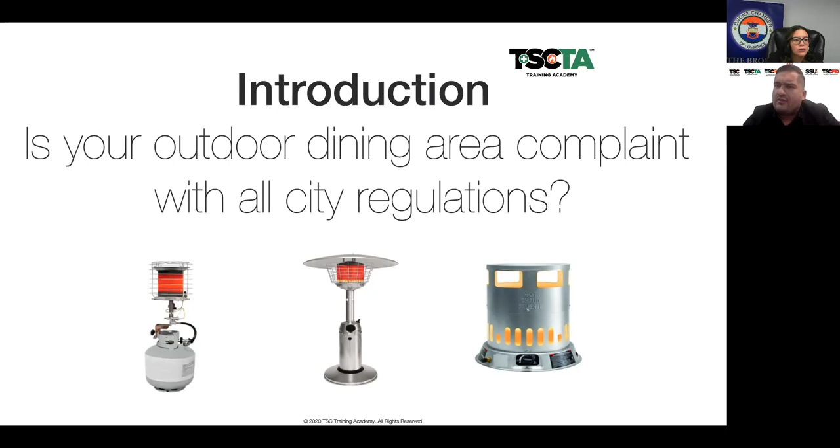So complacency and compliance is what you're looking for. Now, winter is coming, ladies and gentlemen.

And winter's here. Thankfully for the restaurant and hospitality industry, it's been a somewhat friendly winter. But what happens as we move deeper into December and January, when temperatures drop and you want to utilize your sidewalk eating areas? What do you need to know?

What do you need to follow? So we're here, okay? We're going to walk you through how we proceed moving forward.

Is your business compliant? Are you going to be able to comply with the New York City Department of Buildings requirements, Bulletin 008? Are you going to comply with the FDNY requirements for heating? Are you going to comply with the DOT requirements as they pertain to sidewalk and street eating? We're going to walk you through all three requirements, so by the time I'm done, you'll either have some good questions or be guided on what might be best for your business.

So let's start with how did this all begin. Remember, Cuomo put us into Phase 2 for the city of New York. Until then, the city of New York was pretty much shut down.

There was no idea of when a restaurant, bar, or storefront might be able to utilize outdoor seating for patrons, which put a massive stranglehold on the industry. And the industry was suffering.

So once we got into Phase 2, Cuomo provided the industry a lifeline, and de Blasio provided the industry a lifeline. That lifeline was known as Executive Order 126, started June 18th, signed by the mayor. The city of New York was now able to utilize its sidewalks and its actual streets in order to maximize the number of patrons a restaurant could see on a daily basis.

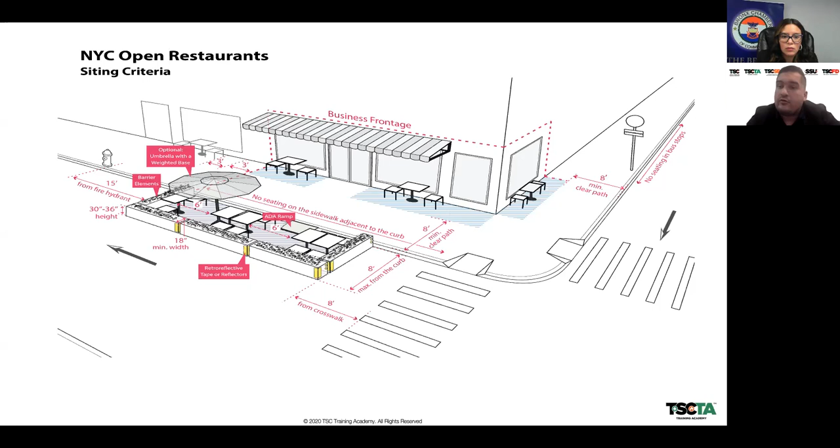There is no modification of furniture applied to New York City streets, and this is very simple. They also require 15 feet from your fire hydrants, and 8 feet from your crosswalks.

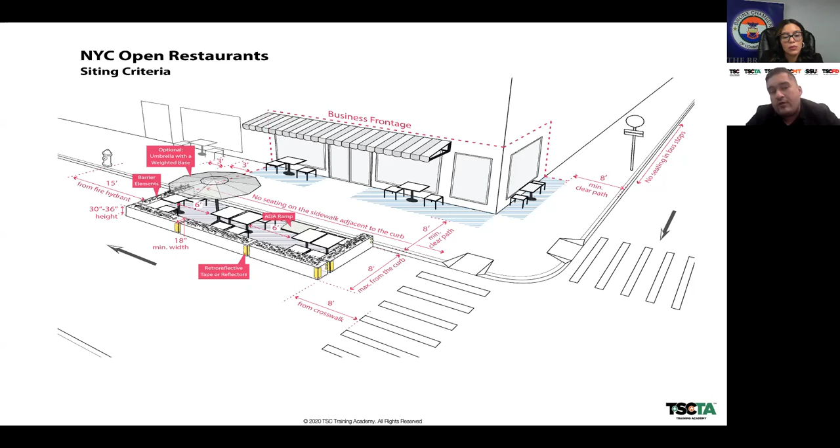What started happening is, if you follow these rules, all city regulations left you alone. Now, if you wanted to participate in a street program, in which New York City closes down streets and multiple businesses could apply on one application, the requirements were a bit different.

You still need to maintain the 8 feet of clearance path for pedestrians. You're still only going to use 5 feet of frontage space in front of your establishment, but the flexibility became the following, ladies and gentlemen.

In this open lane, you could now put multiple stations 6 feet from one another, and if you kept 15 feet of distance for emergency purposes, you had more flexibility for people to be established in front of your business. A home run if you had a program in your neighborhood that was open streets.

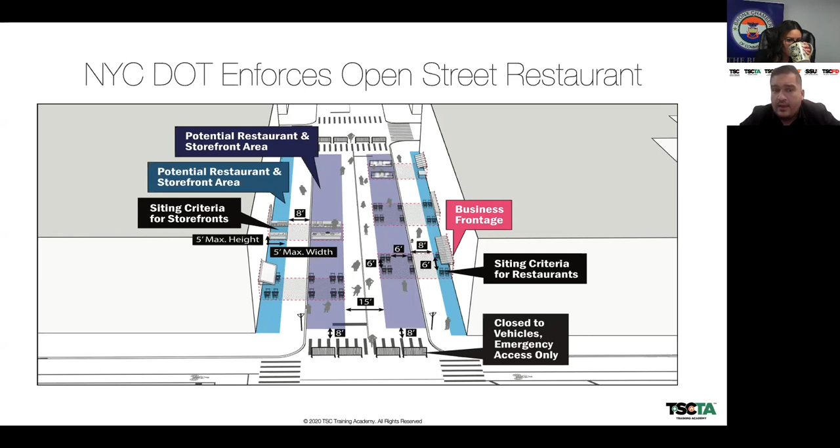We needed to keep, on the other end, distance from your fire hydrant from business to business on each end of the business, and in total we needed to keep 30 feet of actual distance from fire hydrants, 15 feet from each business.

You needed to keep an emergency lane that was at minimum 15 feet in width, okay? And all the other requirements apply.

Now, the difference here is the DOT becomes very specific on the barriers you're using to not allow cars to come in. The advantage here is that you could bring as much furniture as you like if you're in compliance, and you didn't have to start building.

Most restaurants did, but if you had an open street, you didn't have to start building additional furniture to protect your patrons, which is fantastic. In the application you guys fill out under the DOT, you have options for both.

Now, for some of you that might ask, hey Leo, I have a fruit stand, or hey Leo, I have a clothing store. The DOT also does enforce and encourage open storefronts for businesses as well, not just bars and restaurants. Open storefronts is another program you could participate in, which is ideal, and the requirements become similar to the restaurant protocols you have to follow.

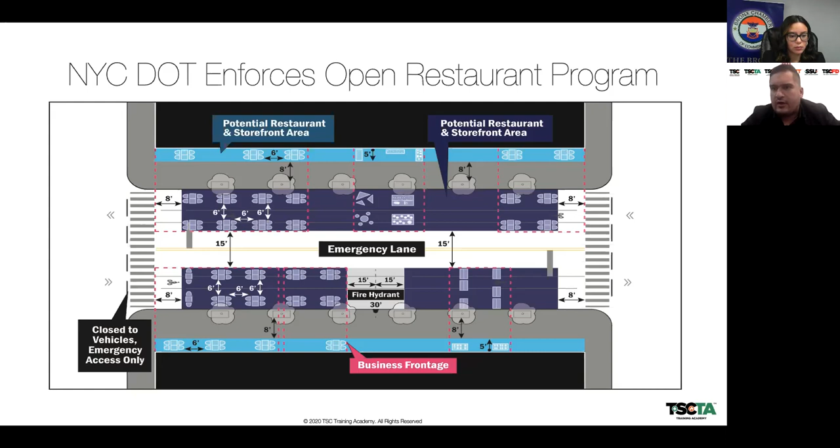Now, I know it's a lot of information moving quickly. Here's a fantastic resource you could reference. This is the DOT, showing exactly what they expect to see. They're in downtown Brooklyn in the Park Slope area, and they'll walk you through exactly what a compliant street and sidewalk eatery should look like.

Hi, I'm Chris, an inspector with the New York City Department of Transportation, here in Park Slope, Brooklyn, on a very hot day, in front of Fonda Restaurant to discuss the open restaurant seating setup in the roadway. You can take a look at the beautiful setup they have here, and if you'd like to be a part of the open restaurants experience, there are a few rules we need to follow. Now, the maximum width of a roadway setup needs to be 8 feet.

You can't have anything further out from the curb than 8 feet that could possibly obstruct vehicles, or like we have here, on a bike lane. Now, when it comes to the width of the setup, it needs to be a minimum of 18 inches, and it needs to be fully closed and a full U-shaped structure all the way around.

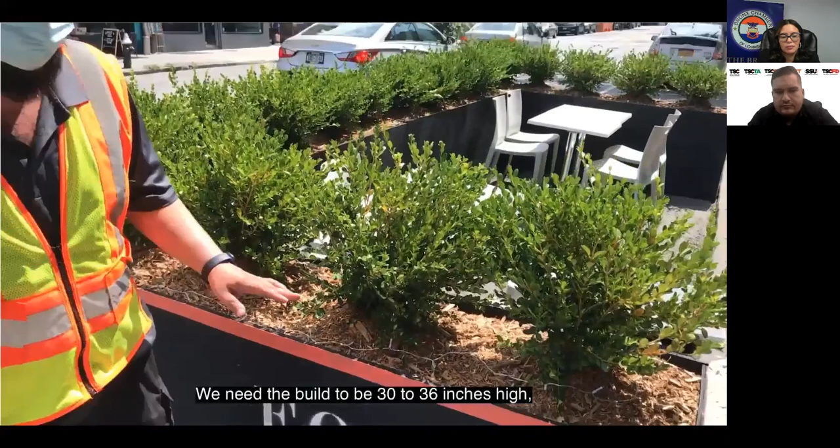Now, this serves as protection for the people dining in the seating area. You can do like they did here and fill the area with soil and put some plants for the beautification of the site. Now, what we need is the build to be 30 to 36 inches high and have reflectors placed at the end so the headlights of a vehicle will bounce off at nighttime for visibility and safety.

Now, as far as the dimensions of where you can put this, it does need to be directly in front of your property. We don't want any dining setups extended into another area. A few other measurements you need to keep in account: if you're near a crosswalk, we need a minimum of 8-foot clearance, and if there's a hydrant somewhere around, you need to clear the hydrant by a minimum of 15 feet. As far as traffic regulations are concerned, we have no stopping, no standing, and bus stops.

You cannot have these setups during active no standing hours, not in front of a bus stop at any time, and not in front of no stopping at any time. You may use the roadway dining if a no parking sign is in front of your business, but remember, you must remove or secure your tables and chairs when not in use.

Now we can discuss what's inside of the open restaurants area. First off, some options that you might have is you can build a platform, which would be flush with the sidewalk and provide ADA accessibility for anyone that needs it.

Here at Fonda, they don't have a platform, but what they do have is an ADA ramp. As long as you have an ADA ramp upon request, this is perfectly acceptable. A few other options that you might want to take into account, especially on a hot sunny day like today, would be a tent or an umbrella.

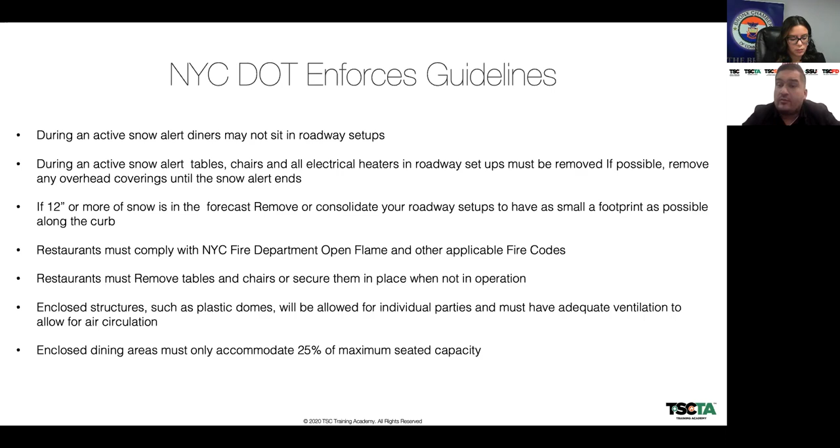If you have one side open, 50%. If you have all sides open, then it's going to be based on your location and keeping a minimum 6 feet of distance. This is just some of the key guidelines that the DOT wants to enforce as the winter months start approaching.

Now we start coming into September, starts getting chilly. Now we're closer to October. Then everyone says, okay, how about now? We enjoyed this program, we complied, it was fantastic for our business. What happens now? How do we move into the winter months?

And this is exactly where de Blasio gives his hospitality business industry a massive lifeline. He goes into stating, look, this worked, let's keep it going. Let's help this industry that is miserably suffering right now.

The city establishes Executive Order 153, in which it extends all of your outdoor seating through the whole year until further notice. And it maximizes your flexibility of human comfort by allowing city restaurants to use propane space heaters. Now, what did the city of New York do?

In this executive order, Mayor de Blasio makes the FDNY responsible for compliance of exactly when you need to have a permit for your propane heaters, how you're going to store your propane heaters, where your propane heaters need to be stored, and where you're not going to be able to see propane heaters.

Ladies and gentlemen, this is what we discuss in detail in a Certificate of Fitness T93 course we offer at the Academy. When it comes to heating, you have some options: propane heating, electrical heating, and piped natural gas.

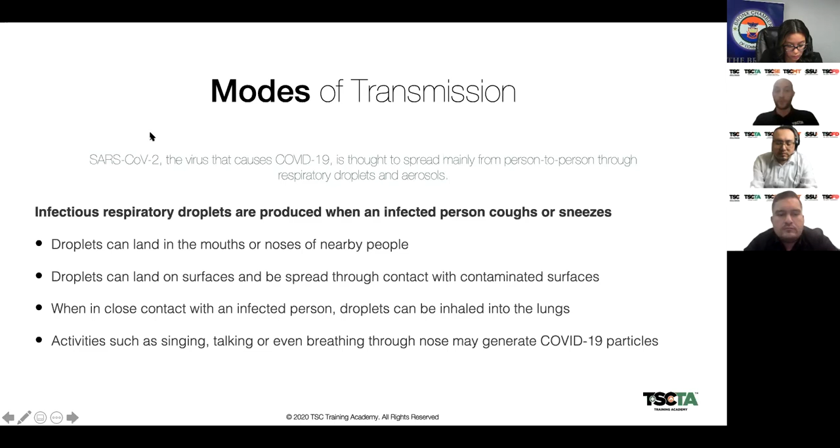So just to give you an idea what type of droplets or particles we're talking about, and how that relates to some other objects or particles you may deal with on a daily basis - normally respirable droplets will have a diameter less than 10 microns. To give you an idea how small that particle is, if you take a single hair, as you can see on the image, and cut it in half and look under the microscope at the diameter of the hair, the diameter of human hair is approximately 50 to 70 microns in size.

So now, how does that tie into the size of particles of COVID-19, of CoV-2 aerosols? The smallest particles are estimated to be as small as 0.1 micron. So you can see the range of aerosols between 0.125 to 5 microns. This is where the particle is small enough to reach your lung tissue and eventually potentially affect you in the long term and cause a medical condition. So the size of respiratory droplet is really what our concern is, and how our ventilation and filtration systems are capable of handling the spread of that virus and that size of particle is an important question to address.

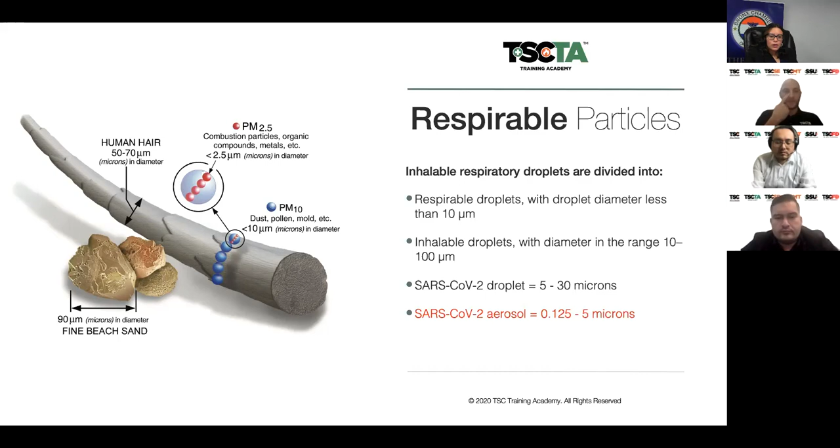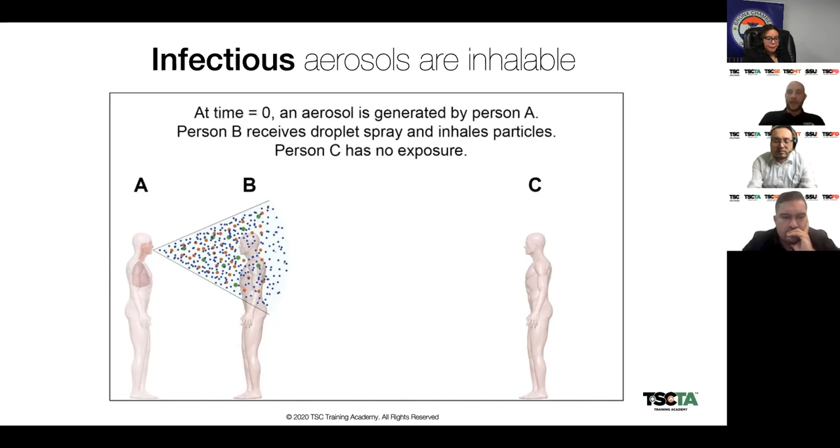Seeing how small these particles are, transmission normally occurs in areas that are dense, where you see larger groups of people sitting or eating. If somebody is sneezing or coughing, the aerosol is generated by person A, and the virus itself is never just traveling as a particle by itself - it's within the aerosol. So the virus particle is in the aerosol that you sneeze, cough, or breathe out, generated by the infected person A. When that air travels, person B may receive droplets first.

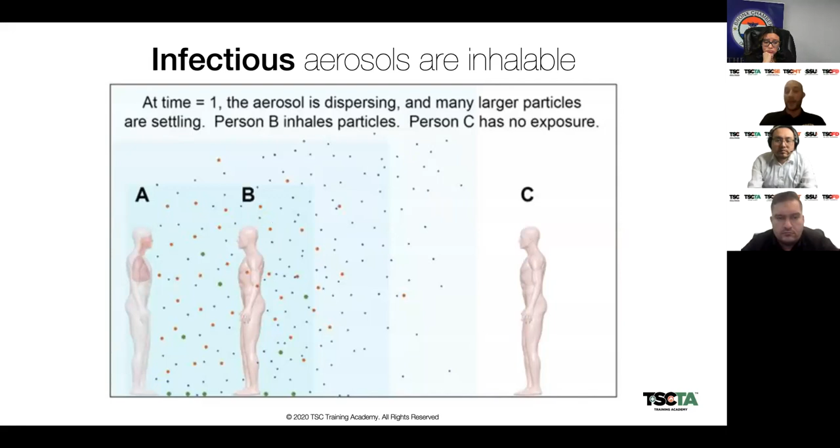Over time, because of how light the aerosol particles are, they start dispersing throughout the space. The larger particles settle down, but the smaller ones - those smaller than 10 microns - start traveling throughout the space and linger there. According to research, that can take hours before those particles actually settle down. During those hours, you have to think about how many people use the same area from the actual exposure that came from person A. So at time 2, after a while, the aerosol is dispersed and many larger particles are deposited on the floor, but person B and C will inhale the small particles that unfortunately may include the virus itself.

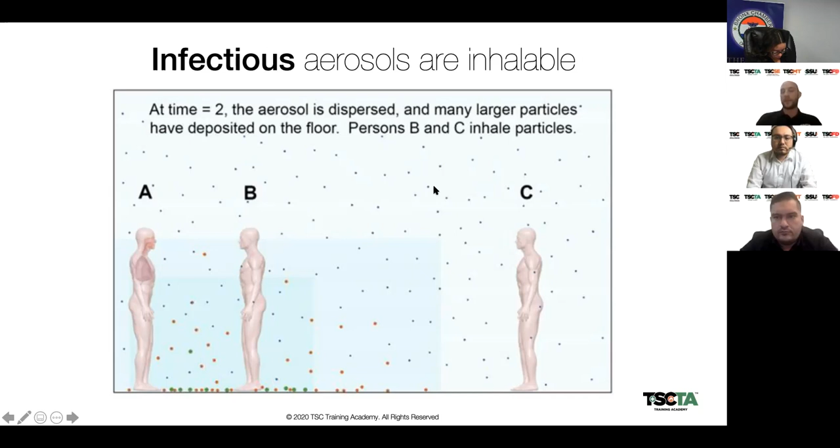One of the main issues is that very often in older buildings, our ventilation systems use recirculated air, and there's not enough fresh air being provided from outside through the HVAC systems. If the air is recirculated and the unit doesn't have a highly efficient filter, there's still a high risk of people inside the building, facility, or restaurant being affected. This means particles may be suspended in the indoor air for a prolonged period of time, so even one person may affect the entire group. So indoor air quality will be a priority.

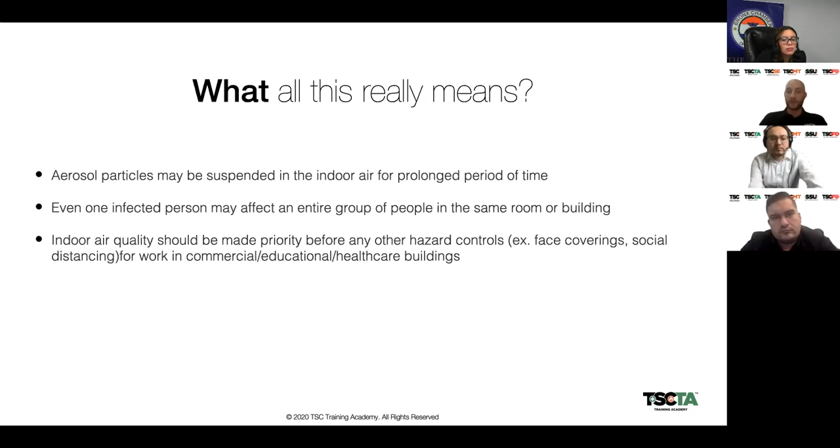But at the same time, this shows why setting up the outdoor area in accordance with the guidance released by the city is going to be vital, and why they limit the amount of people allowed to use the indoor spacing - we're looking at 25% - and outdoor spacing, if enclosed, will have the same restriction.

Moving on to the ventilation system within your facility, restaurant, or workplace - normally those systems are designed more for comfort, to continue supplying fresh outside air. But over the years, we noticed the design of ventilation systems focuses more on keeping us from polluted air from outside and just using recirculated air from inside. The approach with COVID-19 is actually quite the opposite - now fresh air became almost our friend, and we want to utilize a system that provides as much fresh air as possible. Of course, we won't know if that's the case until we actually evaluate the system being used by our building.

Generally, we maintain temperature in the summer and winter to make sure people inside that building or area feel comfortable. We can also use ventilation to reduce potential fire or explosion hazards, or dilute airborne contaminants if you're talking about a lab or industrial environment.

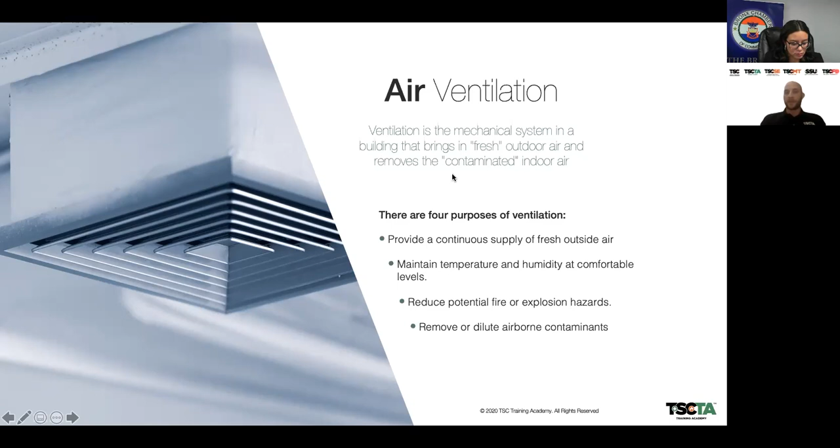So what is critical when it comes to filtering of the air that's being provided to the customers, to the employees?

Ideally, according to some of the recommendations that were released recently by the American Conference of Governmental Industrial Hygienists and ASHRAE, the ideal range of air changes should be between 6 to 12. That's the goal we should have, and something we should verify with either the building management or have an HVAC technician come in to verify that we're within that range.

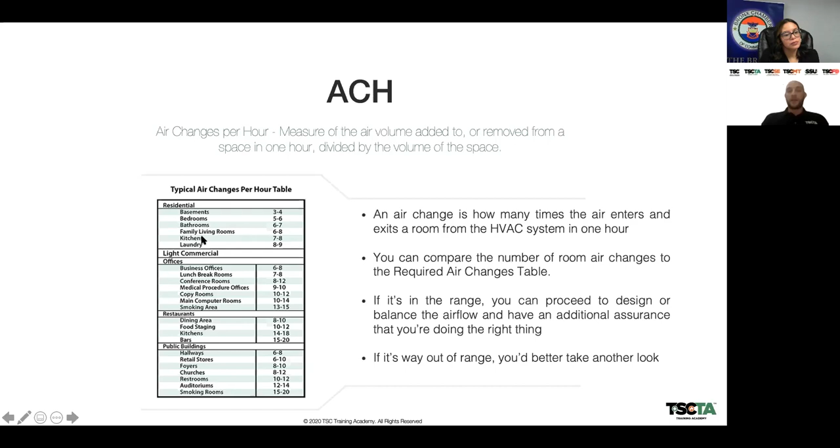Now, the other important aspect will be to verify that the filter being used within our system is actually capable of helping us reduce the risk of spread of COVID-19 particles. I want to bring back the size of particle that we discussed before.

So particles between 0.3 microns and 1 micron, you have no information, no data on how effective those filters are. To be honest, the majority of facilities use filters rated MERV 8 to MERV 10. In other words, when the air is recirculated and somebody sneezes, that air starts traveling through the HVAC system, and technically the SARS-CoV-2 particles are not being addressed at all.

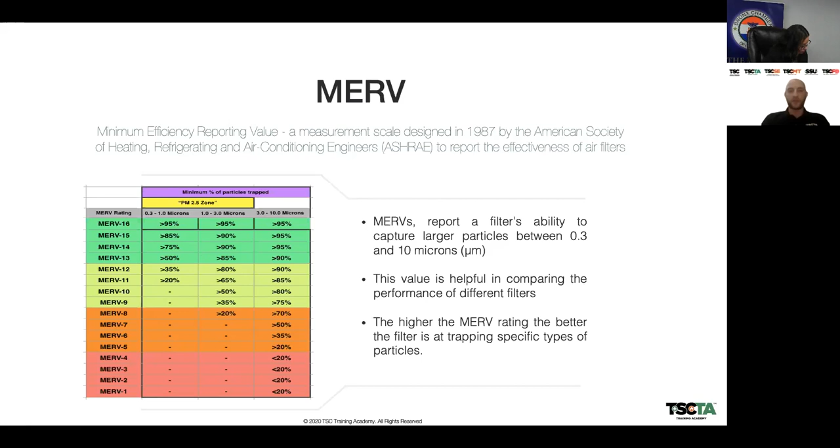Ideally, we can say a MERV 15 or MERV 16 filter would be great, but in reality those filters are usually used by hospital facilities—that's where the real need is. Plus the system has to be able to push the air through that filter, which may not be capable.

So another way of looking at the filters available out there may be a little easier to grasp instead of just looking at the size of microns. Here from one of the manufacturers, they advertise that a MERV 6 filter would be good for lint, household dust, pollen. But if you're looking at a MERV 13 filter, it protects from all those varieties of potential sources of contamination: cough, sneeze, bacteria, viruses.

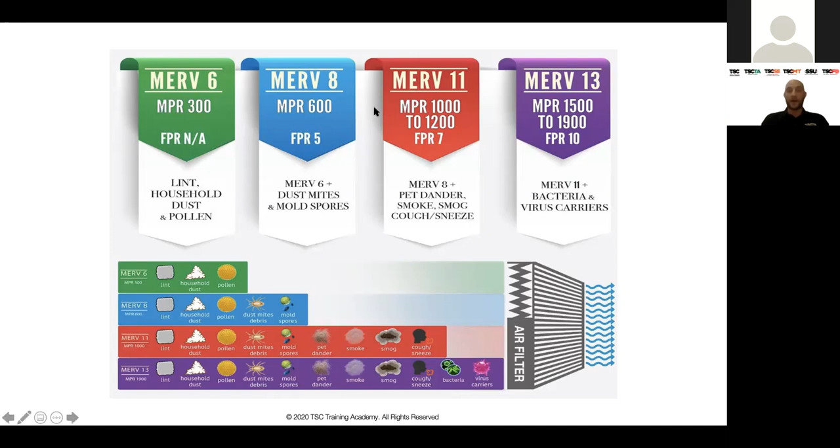So now, again, the question is: is the filter used within my restaurant or my workplace within that range? What kind of rating are we using? It's something that maybe you didn't have to look for before, because it wasn't really required. But at this point, since September of this year, all restaurants providing indoor dining are required to ensure they're using filters rated MERV 13.

You also have HEPA filters, which are high efficiency particulate filters. These are usually very expensive, and normally you would see them with air purifiers. They are very effective because they have the ability to filter 99.97% of particles of size 0.3 microns and more. They also technically filter particles that are obviously larger and smaller in size. There's more science behind it, but generally HEPA filters are desirable and definitely meet those requirements.

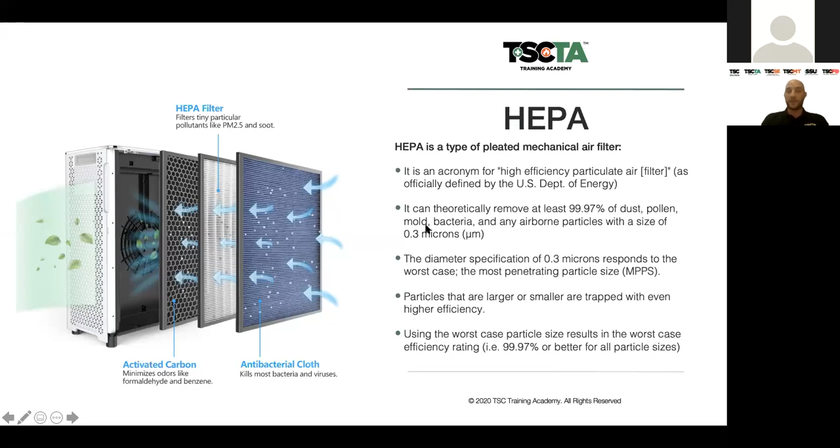So again, the question is: is my standard building ventilation effective enough to prevent the spread of the virus? Usually your system will utilize approximately 10 to 20% fresh air, and the MERV filters will be 8 to 10 on the rating chart. Which means that with a standard ventilation system, we have to obviously take additional steps to ensure that customers, and especially employees who are there full-time, can work safely in those environments.

Now, 10 to 20% of fresh air is recommended, though 100% fresh air would be ideal. Simply put, the more the better, and 10 to 20% is really very little if you think about the amount of air that will be recirculated.

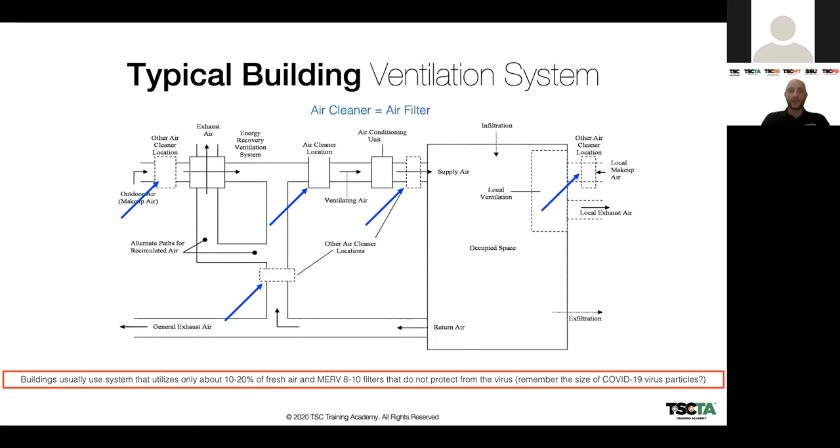So in September, Executive Order 202.61 was released, and since then, all food service establishments in New York City were told that if they're using indoor dining, central air handling systems will have to be equipped with a minimum MERV 13 filters.

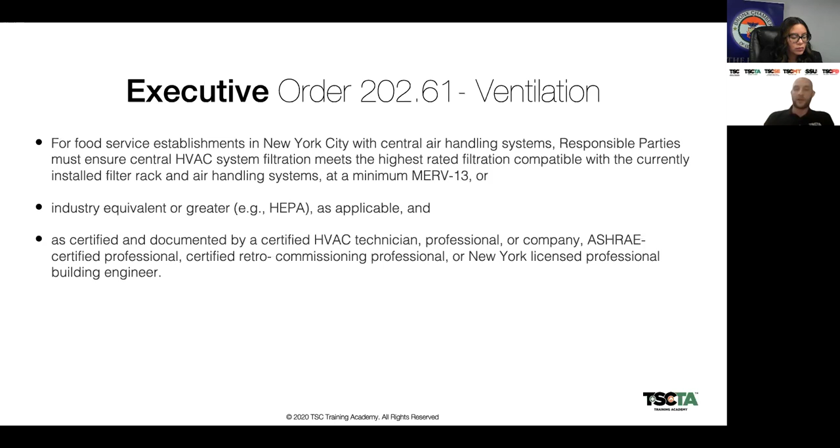And of course, if you have a higher rating, that's fine, or industry equivalent or greater filtration, for example HEPA. That must be certified and documented by a certified HVAC technician, professional or company, or an ASHRAE certified professional—not just us saying this should work and adding a filter to our HVAC system, because we may not even realize the installation is wrong. Maybe we didn't follow manufacturer specs, or maybe our unit is just not capable of pushing the air through that filter.

So what about other alternative ventilation methods? Will this work? What if we just open the windows? The problem with just opening windows for fresher ventilation is there's no way to measure how much filtration we actually get—there's no filtration itself. So even though it may work outdoors, where you're leaving a whole side of your dining area open, indoors it gets complicated because of the configuration of the space.

Purifiers, great, not a problem. Purifiers are great as an addition. So if you want to have a purifier next to each table, awesome, but by itself a purifier will not provide the quality of air needed. The main limitation of purifiers is that they're designed for a specific square footage of area. So the question is, can we cover the entire square footage we're utilizing in our facility? Most of the time, you won't be able to do that. So an air purifier alone also will not do the trick.

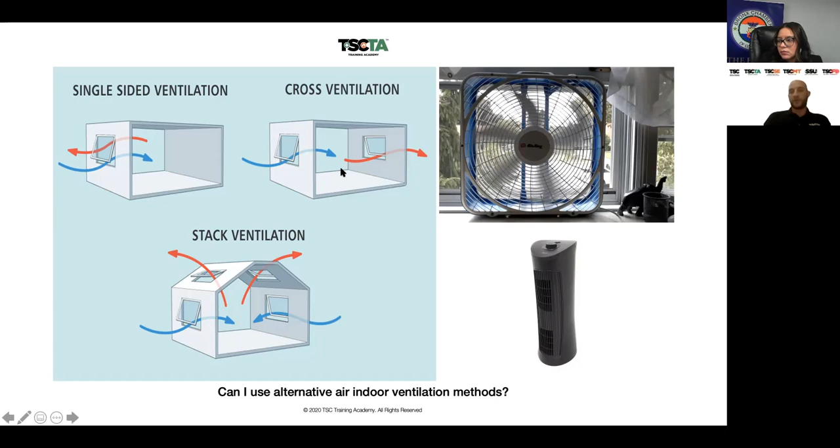So altogether, the idea is how can we protect the worker, or how can we protect the client. You need effective ventilation—as many air changes as possible, with a source of clean air. On top of it, adding a portable air cleaner is great. But the main focus will be to make sure that the same air is not being recirculated throughout the building, throughout the facility, throughout the dining rooms.

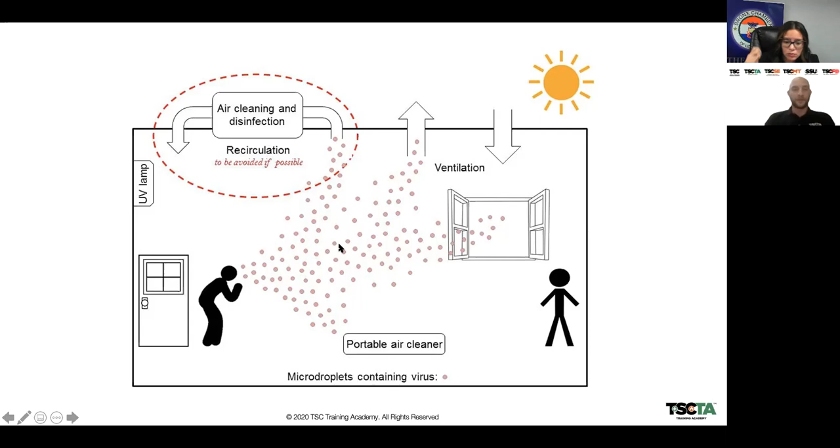So a few words about personal protective equipment. If you want to find out more about some of these ventilation principles, we go in depth during our COVID courses. Here we just want to bring up the issue of why indoor dining is limited, and encourage you to look into your ventilation system, figure out the filtration, figure out the air changes per hour that the system is utilizing. And if you're renting the space, you have a right to that information.

So in terms of personal protective equipment, also under Executive Order 202, keep in mind that all staff is required to wear face coverings at all times. If you're in need of face coverings, such as surgical masks, there are free supplies provided by the Bronx Chamber of Commerce that you can pick up from their location. So this shouldn't really be an issue—it's just a matter of getting the supply.

But it's up to the employer to make sure that all staff practice hand hygiene and also use bare hand barriers consistent with state and local sanitary codes. The face coverings is something I really want to make sure you don't underestimate. A great example of how the principle of transmission works is when we have two people wearing face coverings—you can see an example of somebody who might be the carrier and how that person may affect a healthy person sitting, let's say, across the table. So if they both wear face coverings, the risk of spread is very low.

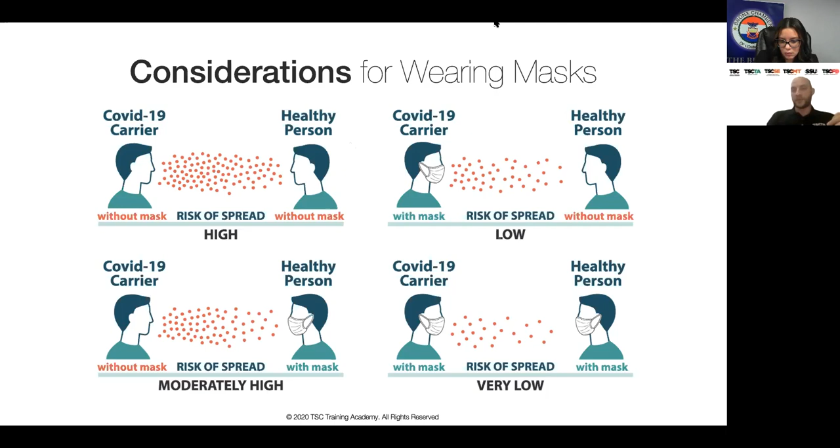If you have both people just having their face exposed, the risk is the highest. At the same time, what's interesting is if you have a COVID-19 carrier wearing the mask, the risk of spread is relatively low, even if it's just the carrier wearing it. Remember, at the end of the day, the purpose of wearing a mask and face covering is just to minimize the chance of exposure.

So just a quick comparison. You probably heard about surgical mask versus N95 or bandana. The surgical mask is one-time use, and it could help stop viral spread, but keep in mind these surgical masks are only good for larger particles.

Now the N95, which are the National Institute for Occupational Safety and Health approved respirators, they are almost as effective as HEPA filters. They can filter at least 95% of particles. They're highly efficient, but right now we are limiting these to healthcare workers, caregivers, and emergency personnel.

And of course, bandanas or additional face coverings were also added as recommendations. Just because, even though they don't eliminate the problem, they do allow us to limit the chance of transmission.

Now, just keep in mind, surgical masks are really one-time use, and I know that with limited supplies we're trying our best. But you have to understand that after breathing through that mask all day, the bacteria accumulates.

I remember reading a study conducted on a person wearing the same surgical mask for a week while commuting to work and back, so we're talking about just wearing it for half an hour a day each way. They found 3 million different types of bacteria inside that mask after wearing it for a week.

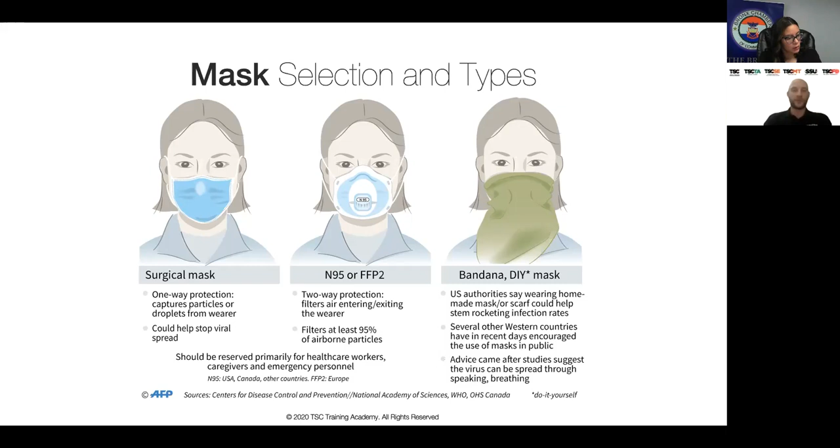So remember how to wear a mask. Wash your hands before you put it on. Put it over your nose and mouth. Secure it under your chin. Don't let any straps hang. Try to fit it snugly against the sides of your face and make sure you can breathe through it.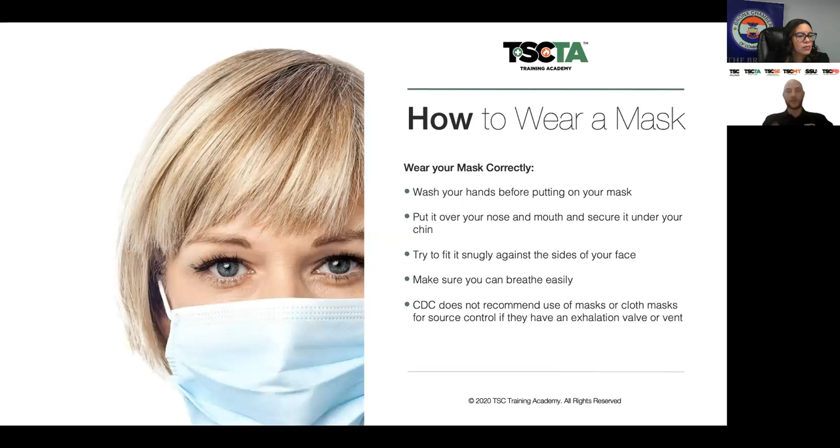When you take it off, make sure you don't touch the inside of the mask. Make sure you pull the strings from behind. Don't touch the contaminated potential surfaces as well.

So a couple don'ts, right? And we see it all the time. We do training, we see people just keeping the mask under their nose. You do realize you're breathing through your nose, and those tiny little droplets we were discussing, guess what? They also come from your nose. So it's not only about you, it's also about us. If I'm the employee of a restaurant, if I'm working for the restaurant, I want my customer to wear that mask properly because it's also for my protection.

Here's another way of tackling that problem. We've seen people doing all these different things, they have their own styles of wearing a mask. It's not a fashion statement. It's supposed to help you. It's supposed to protect the people around you.

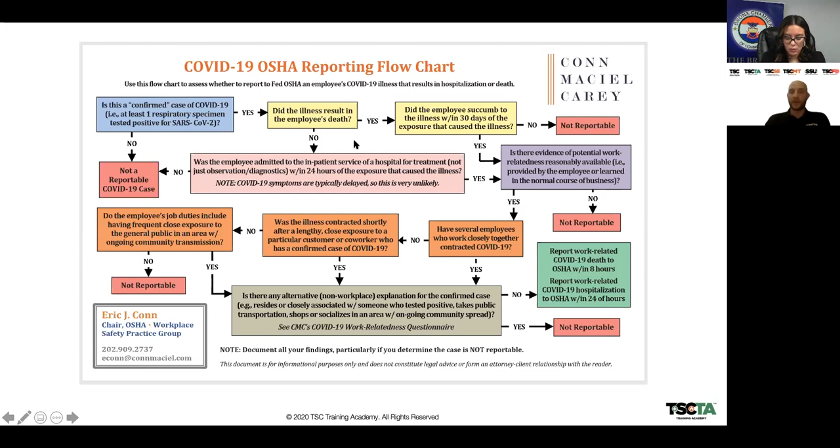So again, a flow chart would allow you to determine, am I actually falling under that criteria? On the OSHA website, please feel free to look it up. You can report that online. You don't have to send letters. You can call the office, or you can submit it online. And then, of course, if they have any questions, they will reach back to you.

Okay, so before we do Q&A, please keep in mind that as TSC family of companies, we can help you with services that tie into COVID-19. So if you need a written plan for reopening, because maybe you're a bit overwhelmed with all those executive orders and legislations, we can help you with that. We also do screening, and we have our own equipment store, in terms of face coverings, gloves, respirators, sanitizing products. We're also able to help, as well as training.

And Leo mentioned different courses, COVID related, but not only. We do construction safety, general industry safety, OSHA courses. So please visit our website and get familiar with our consulting part. We also have our medtech technicians and fire safety professionals. And as Alberto mentioned before, you can email us with questions or inquiries.